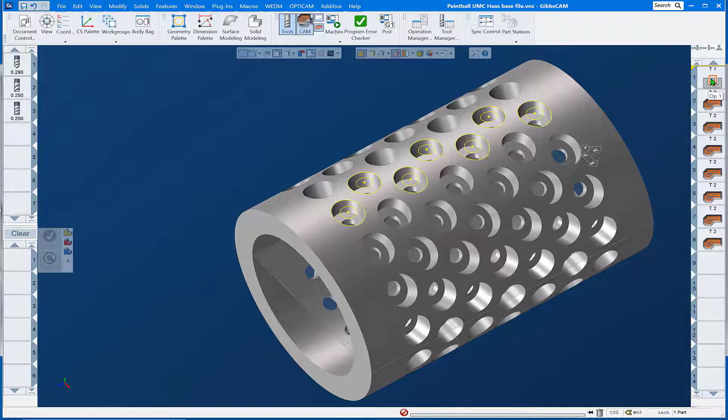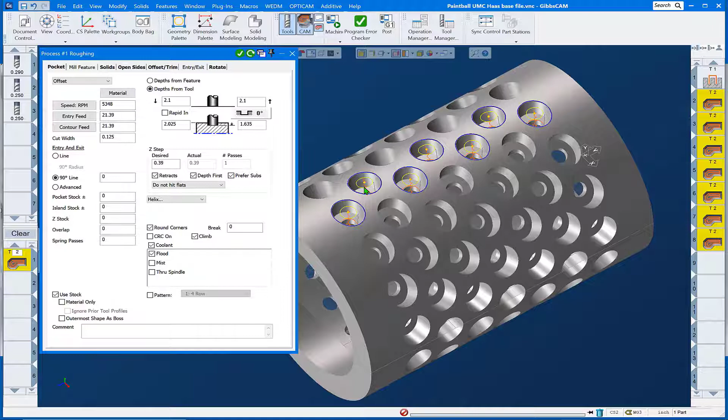We're looking at a rotary encapsulated die here that we need to do some repetitive toolpath on, and then rotate it around this part to complete the operations we need to perform. So looking at this, we have a simple drill routine running down this row of 4 and back up this row of 3. And we also have a roughing pocketing routine that's doing the same thing. Down the row of 4 and back up this row of 3. And there's actually 13 instances around the part.

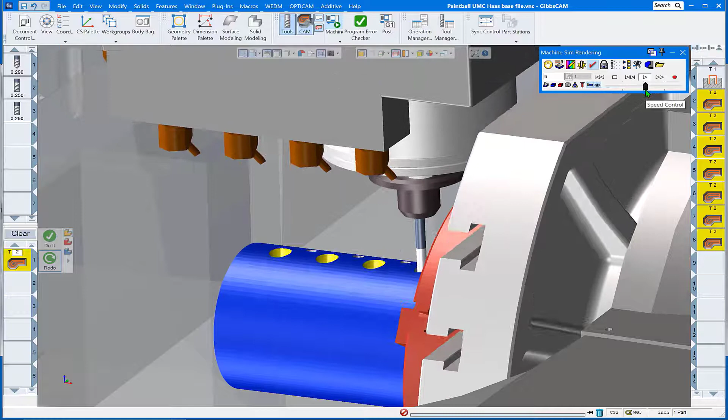So let's take a look and see what this looks like in cut part rendering. We got our Haas UMC 750 set up here. And we'll go ahead and do a render start. And we can see that it drills the 7 holes right in the manner we want. And now we're pocketing down a row, back a row, just what we need. Okay, well, let's get this populated around the whole part then.

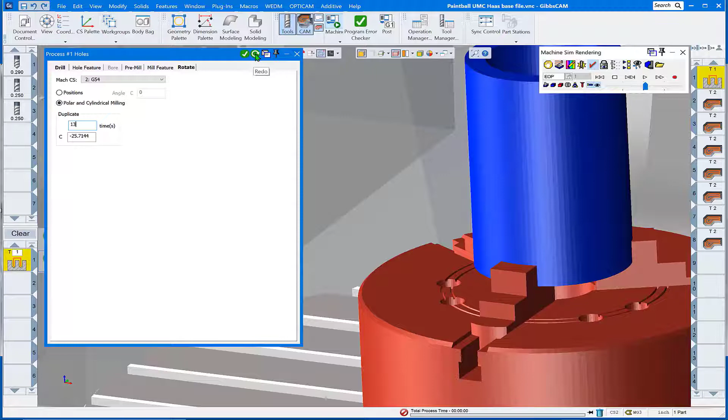First off, we'll do the drill routine. We're just going to come in here under the rotate tab, tell it we want 13 instances of that at this angular displacement, and give it the redo button. And it updates that process and operation over there on the right. And we'll do the same thing for the pocketing routine at 13 more instances at the same angular displacement. Say redo it. And the rendering updates.

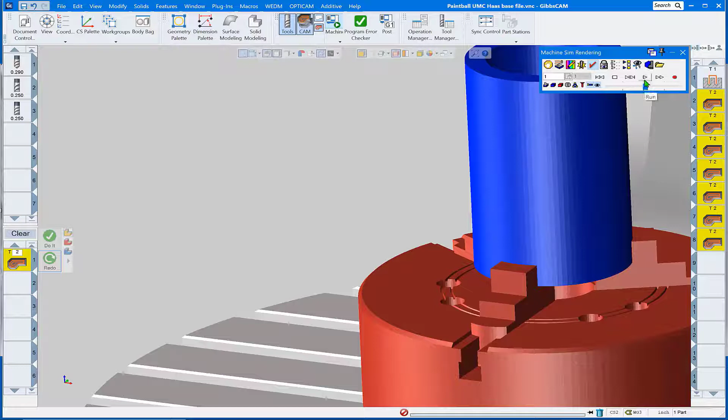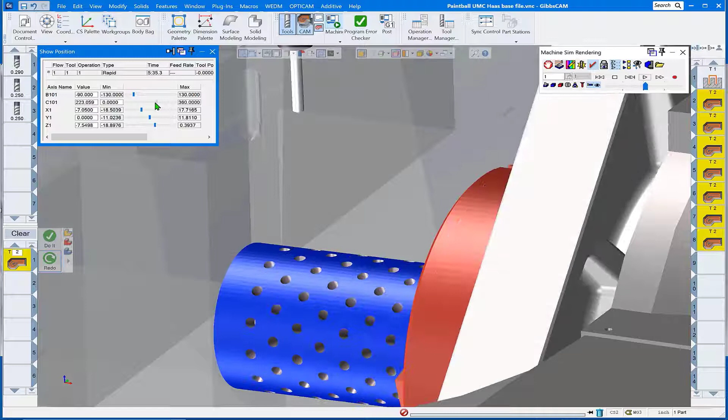And let's rerun the rendering. The play button here. And bada bang, it knocked out all the drill routines. Let's take a quick look at what we got here. We open show position, we can move the Z-axis head up out of the way and rotate the C-axis around to see what we have. And yes, we covered all the start holes we were supposed to on the die.

Let's go ahead now and run the pocket routine. Well, that is not quite what we were hoping for. What it's done is taken the operations over on the right hand side and done exactly what we asked it to and repeated it 13 times at that angular displacement around the part. That's not quite the toolpath we were hoping for. So let's undo that. Let's set this back to 0 and do a redo of that.

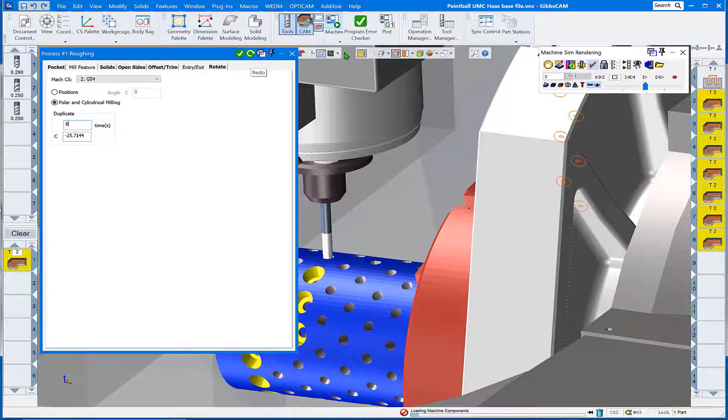It updated the rendering, and before we start the rendering, what we want to do is transform the toolpath. Tip of the day. We have these operations all highlighted, and we're going to transform that toolpath in Plugins, Toolpath, Transform Toolpath. The Transform Ops dialog comes up.

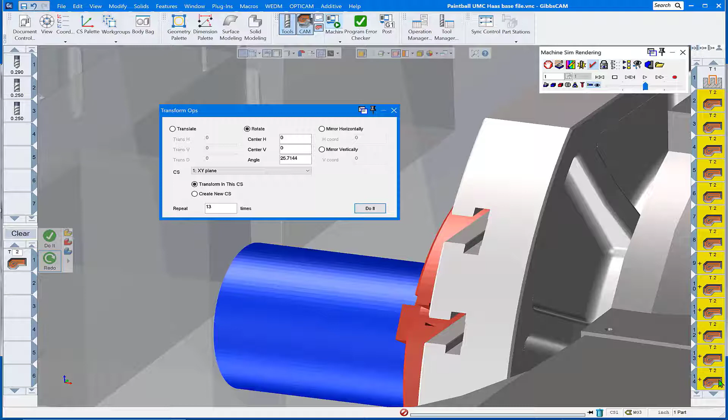We have the ability to translate either in HVD or in a rotary fashion, which we're going to do today, around an HV center at our angular displacement we wanted. From the XY plane, we're going to transform in this CS 13 times. We'll do the do it button. And sure enough, we had our additional transformed operations over here on the right.

And let's run a render and see what we have. Here we go with our pocketing, and there we go. Down the row of 4, back the row of 3, second instance down the row of 4, back the row of 3. So there you have it, Transform Toolpath, one of those easy, quick tools in GibbsCAM.